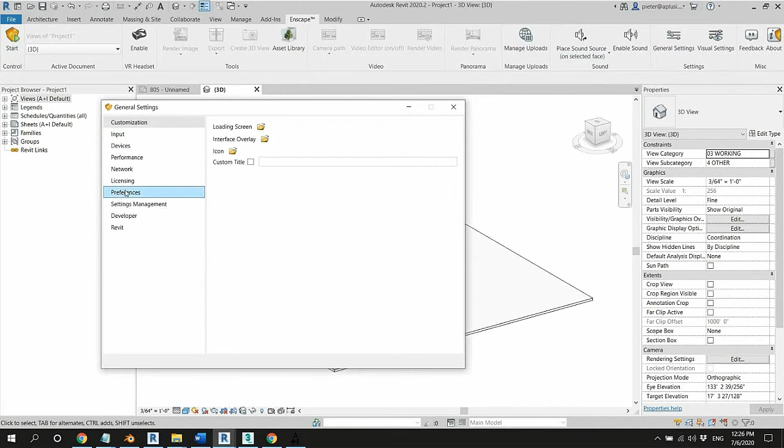If you open this for the first time, there will be false. You can just remove that and say true. Then if you launch your Revit and go to general settings, there will be a new tab here called developer. Click on that. That's in general settings, not visual settings, general settings.

Yeah, general settings, correct. You can set this now to mixed. You can ignore local, set it to mixed, and assign a folder, which is the location of your asset library, the same folder we loaded into the asset creator. Why mixed? Because it allows you to see both the Enscape and the custom assets. Yeah, that's correct. If you set it to local, it would render only local assets, and if you had a tree from the Enscape library, it would ignore that. So mixed is a much more useful setting for us, at least the way we use this.

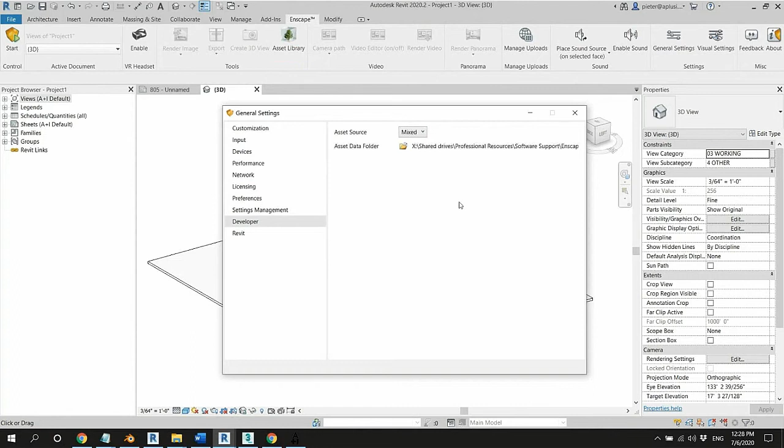One thing you'll have to remember once you start using local custom assets is that you always want to render on mix, if you're running Enscape, because remote will only render Enscape standard assets, not your custom assets. Once I set it to mix and open up my asset library, it will load assets from your custom library. So if you want to place an asset from the standard library, just go to your developer tab, switch it temporarily back to remote, open the asset library, place the stuff from the standard library that you want, then come back and put it back on mixed. That's how we've been using it.

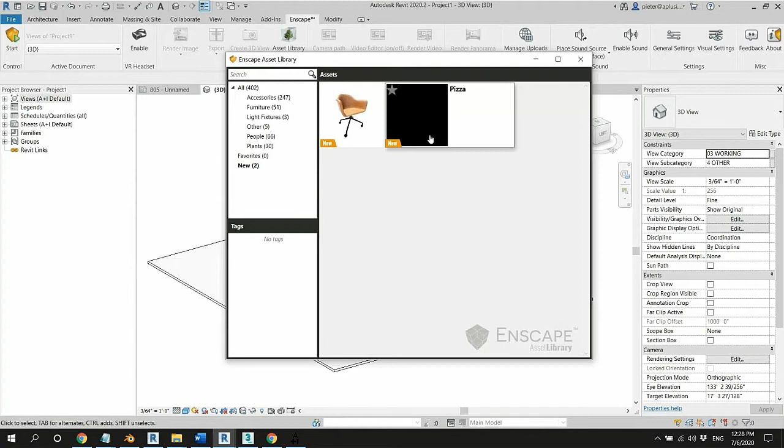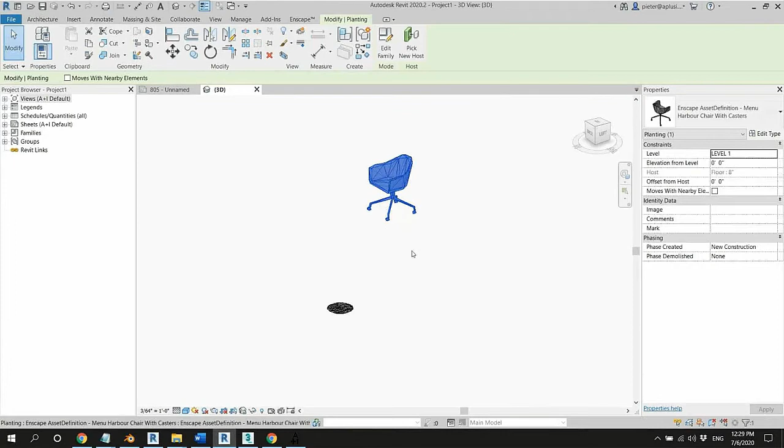So let's place this pizza. This will show the placeholder geometry initially. That is correct. Okay, let me just add a chair next to it, just as a test. If this doesn't show up, the chair should show up. Okay, so the scale is appropriate. Yeah, so that was a success. So far so good, I would say.

So let's launch Enscape, see what we got here. I should say that this asset is still using 70 megabytes of textures. That's way too much, so I should go in and downsample the textures. Gotcha, reduce the resolution on that. I can do that at any time.

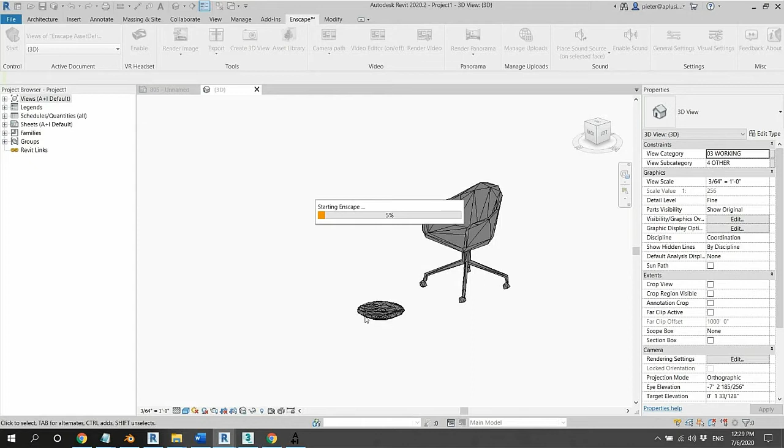But you can do that in Photoshop. You don't have to reopen the asset, you're just changing the material. Exactly, you're just modifying the map. Also, if you made a chair and the leather fabric isn't working out really well, you can just modify that texture without exporting everything. It's actually a pretty convenient workflow. Do you have to modify all of the textures? You know, because there was the displacement. What different materials were in there?

So let me just show you. For modifying the assets, you've got two options right here. You could go back to the exports folder, let me just maximize it. This, if you remember, is where we stored all the exports that came from Blender. So one option is to modify them here, like open the texture map, save them here, and then say override GLTF files and load them back in again.

The modified files will override in the library. You can also go directly into your library, which is here. The name of the folder of the asset is automatically generated based on the category plus the name, so in this case I'm looking for accessories_pizza. So this is your local asset library. Yes, as you can see, over time we've already built quite a few, and we're actually planning to add a lot more. If you go into subfolders, you will find the GLTF files here, and you can also directly modify them here.

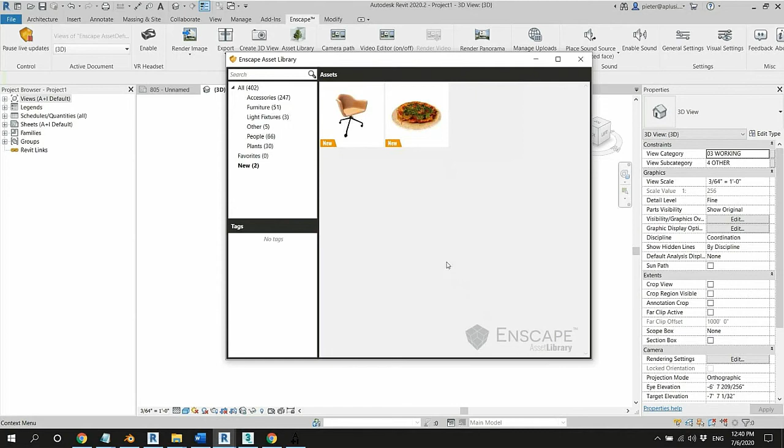Okay, so you've actually rendered it out with your own - with Enscape, you're creating the thumbnail. Oh good, okay, so you're just overriding the other one or updating it. Yeah, and so now if everything works as expected, it's just loading my entire library - like the first time you open it up, it always... Oh, there we go. Oh that's great, Pieter, fantastic, fantastic.

Any other good practices that you would use, best practices? I think the main thing that I've seen is people using very detailed models, and a lot of the issues you're seeing is trying to load in an asset that's very high poly and use it as is. In this kind of workflow, it isn't going to work very well - especially not on a scale where you're building your own library and reusing assets a lot. It's worth putting in a little extra time, and it can help to start off with a good asset, one that's closer to the polycount you want.

Are there pros and cons of using photogrammetry assets versus things that are deliberately modeled? So photogrammetry assets aren't necessarily bad, and actually a lot of photogrammetry assets will have a very even triangulation, and so when we use the decimate modifier, that particular modifier works very well in those situations - for photogrammetry, yeah, because the mesh is very uniform.

It isn't a very clean mesh, but it is a very uniform mesh, and so modifiers like decimate work pretty well on them. For example, we've used scans, some we made ourselves, and you can have a million polycount on those, but those will come down very well using the decimate modifier. You can go to 0.001% as an extreme value and it will still work pretty well. So yeah, photogrammetry isn't necessarily bad, it's just if you try to use it as is, it might be a little hard.

It would take about 5 to 10 minutes probably to create an asset. Once you have the muscle memory, once you set up the system so the settings are saved a little bit, and you have the quick access menu and know the shortcuts, it can be pretty quick.

And so what I tend to do as well is kind of collect - oftentimes we end up needing a whole series of assets. We just bought a package of 20 books, or collections of books, stacks of books to add to a library. We bought a package of 20 people using gym equipment for a project. So I tend to do them in batch, and then the time it takes per model goes down drastically because you're reapplying the same settings to every model - I set up one model well and just copy the settings to all the others, and then it goes pretty quickly.

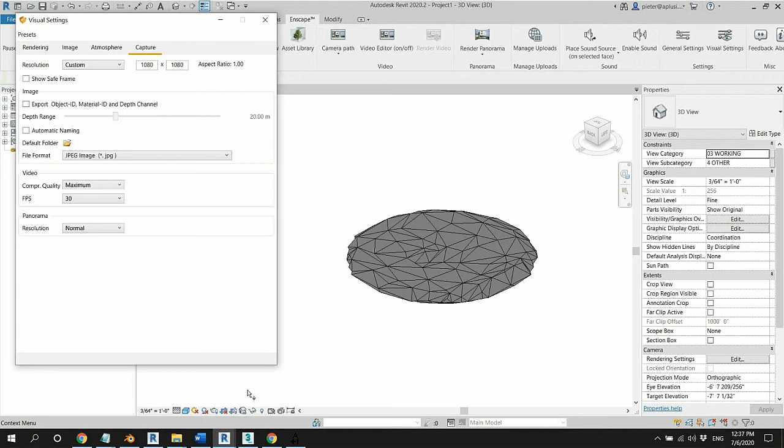Even if you buy them, you still have to clean them up and do some post-production on them. It might work out of the box, but oftentimes you end up with not a very optimized asset. We use our library so often that I want the library to be optimized so that people don't have to worry about using stuff in the library.

Is this something that you're doing in your company? Are you doing this yourself, or do you have other people that help you? We're hoping that more people will come up with the skill sets so that potentially we can outsource a little bit of this.